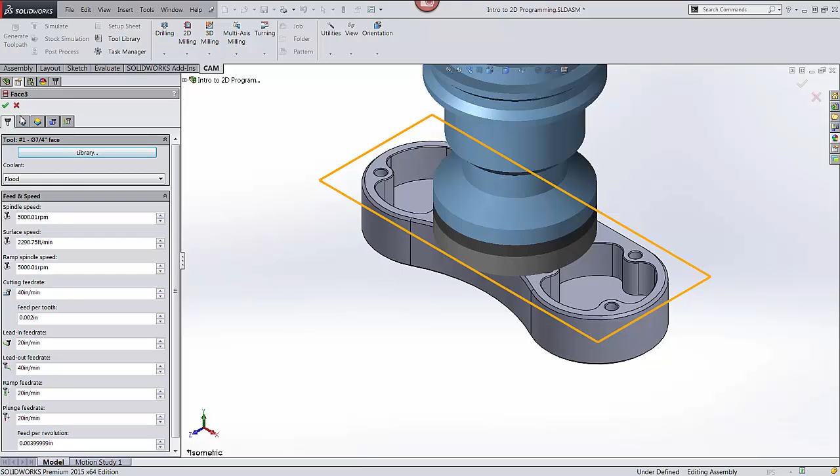Next, I'll apply a 3D adaptive toolpath to rough the inside and outside of the part, leaving stock for finishing operations later.

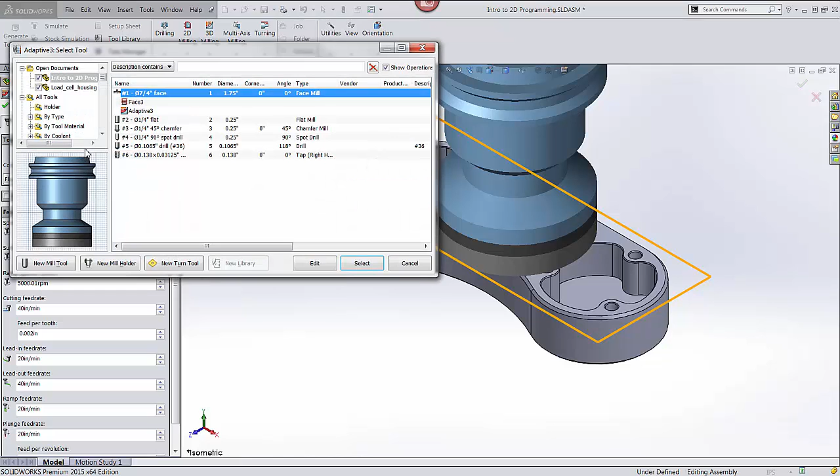3D adaptive clearing is a high-speed toolpath that analyzes the model and the stock to make intelligent decisions while machining the part. Now let's apply finishing toolpaths.

First, I'll apply a 3D horizontal cut to finish all flat surfaces and the adjacent vertical walls. We'll use a 2D contour toolpath to finish around the outside of the part.

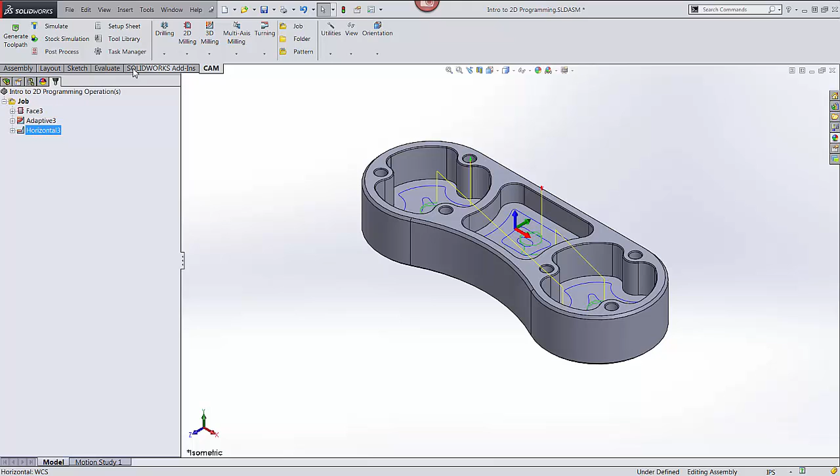You may have noticed that this is the first toolpath where I actually select geometry. Let the software do the work. Now let's deburr the outer edges of the part using a chamfer tool.

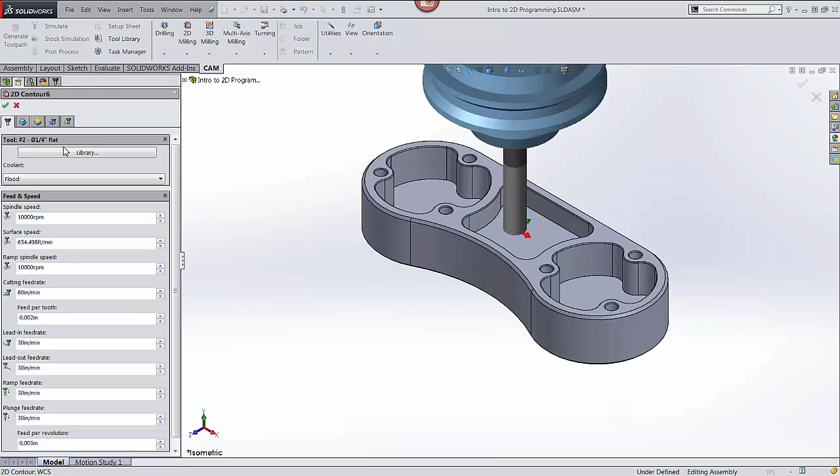I'll pick the bottom edges of the chamfers. If the chamfers are different sizes, that will be automatically accounted for.

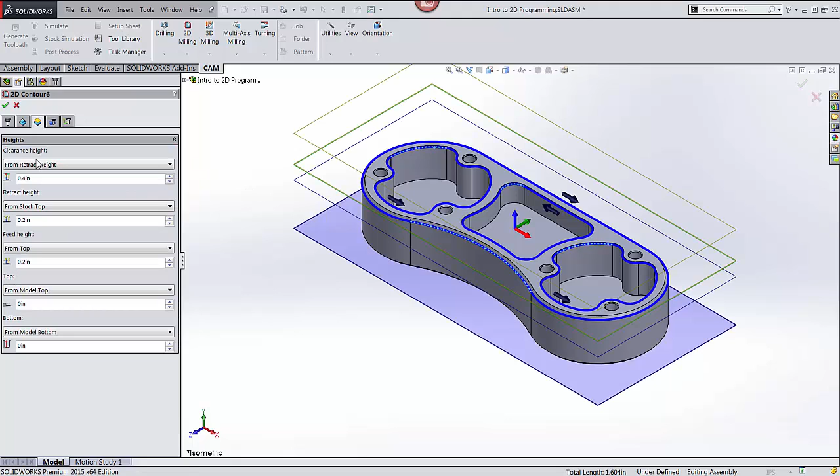Select Contour as the depth, and then set the tip of the chamfer tool to cut 50 thousandths below the bottom edge of the chamfer.

Next, we'll spot drill, drill and tap the 6-32 threaded holes.

If you select the conical face on the model when using a spot drill, the system will automatically chamfer the hole to the correct diameter.

With the operation selected, press Ctrl D on your keyboard to duplicate the operation. Right mouse click and edit the new operation.

Pick the tap drill for the 6-32 hole.

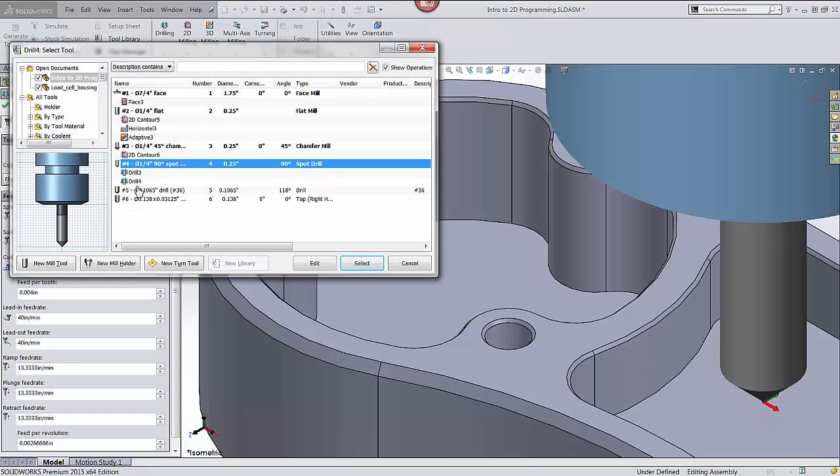Select the cylindrical face and then set the depth of the hole a little deeper to accommodate the tap in the next operation.

Ctrl D again to duplicate the operation. Pick the 6-32 tap.

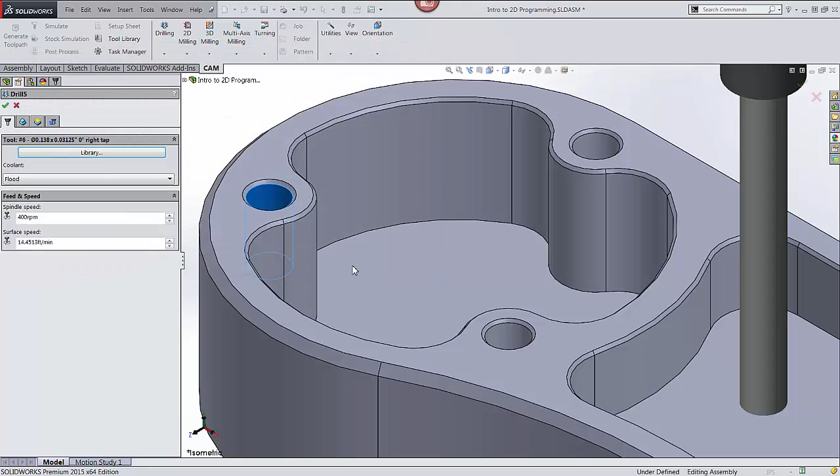Remove the extra drill depth. Set the cycle type to tapping.

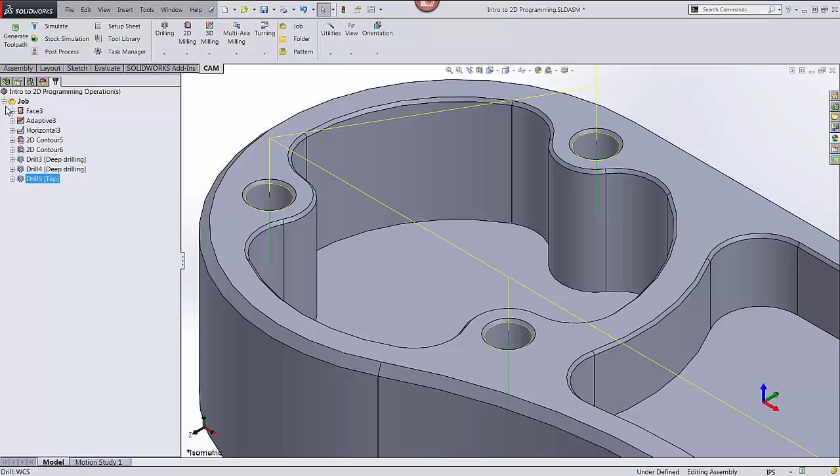As you can see, we were able to program this part in a little under 5 minutes. Now simulate to view the results and verify the programming technique.

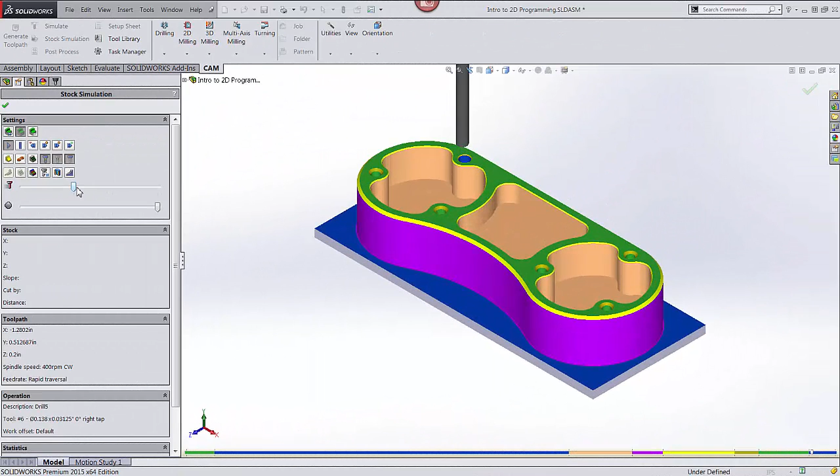Post-process to output G-code.

Now here's where it gets really interesting. HSMWorks has some fantastic tools built in to increase productivity.

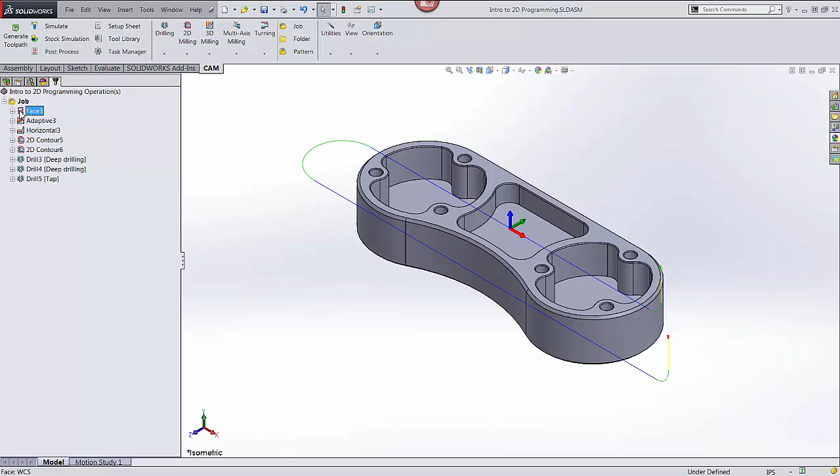Let's say you run families of parts or similar processes. You can easily create templates to save your workflow. Store a template.

Open a new part and import your operations.

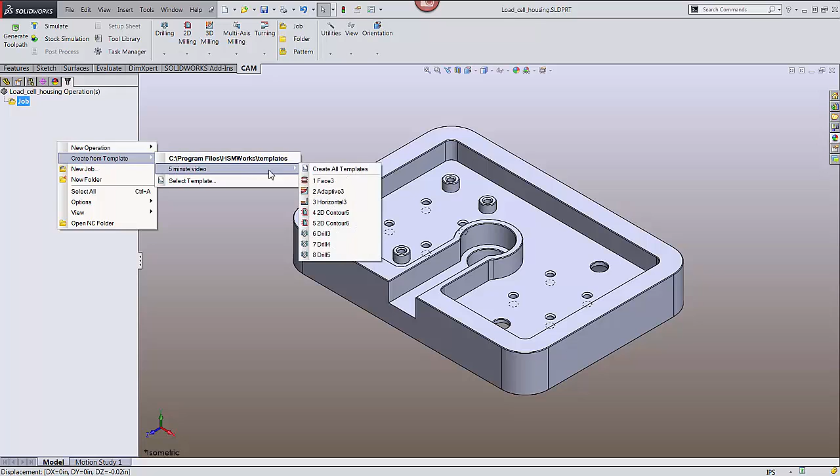You'll remember that for the first 3 ops I didn't need to pick geometry. Regenerate the toolpaths and they'll be applied to the new model.

Pick the outside contour. Pick the geometry for the chamfers.

Pick the new geometry for the tapped holes.